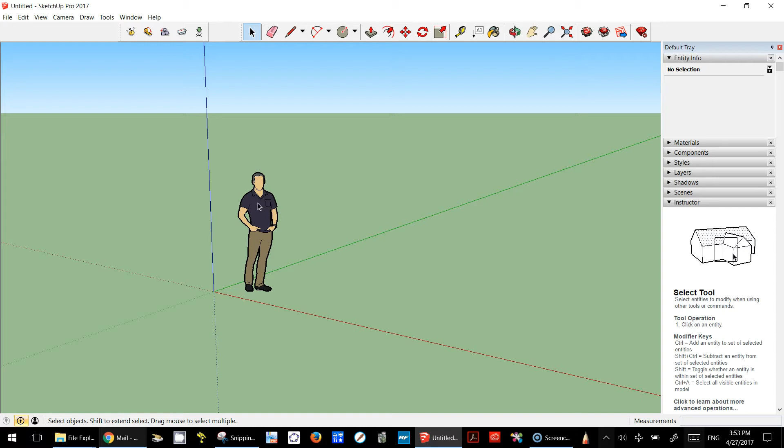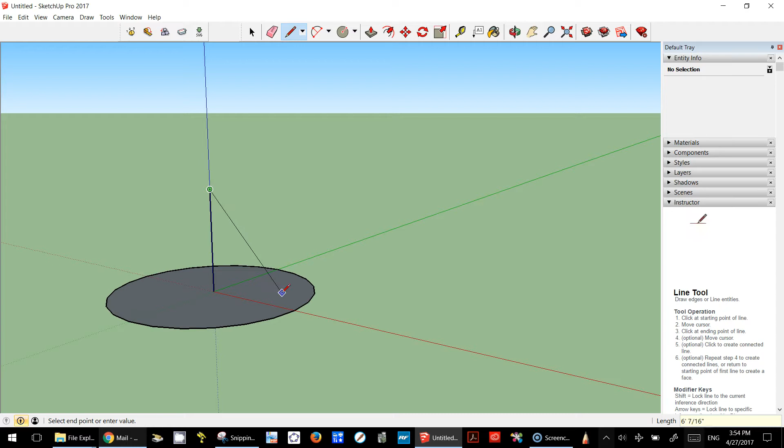First I'm going to get rid of this guy, right click and erase. Then I have to create a cone. Using the circle tool, I'll put 5 feet for the radius. Then I'm going to draw a triangle, going up maybe 5 feet, using a line tool to draw a triangle here.

Then we can use the follow me tool here. So we choose the circular path, say follow me, and click on that. So we got a cone.

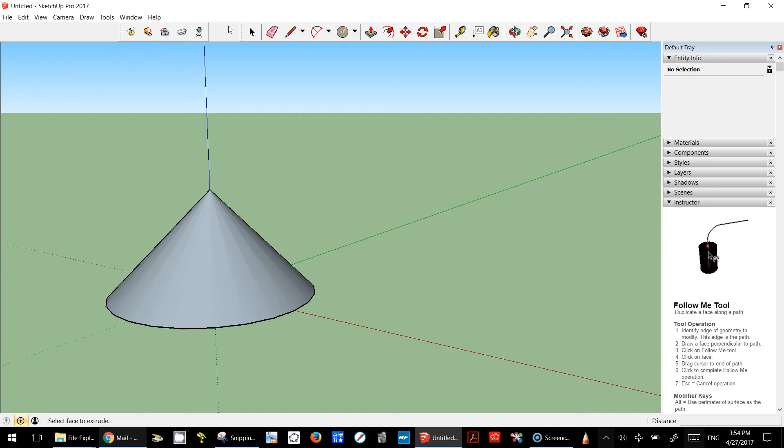The first thing is I'm going to make a group so that we don't destroy this. Choose the whole cone, right click, and say make group. So it's like one chunk.

Then I'm going to move this to move the vertex to the origin. I'm going to move it down here, and it kind of locks in, so it's kind of nice.

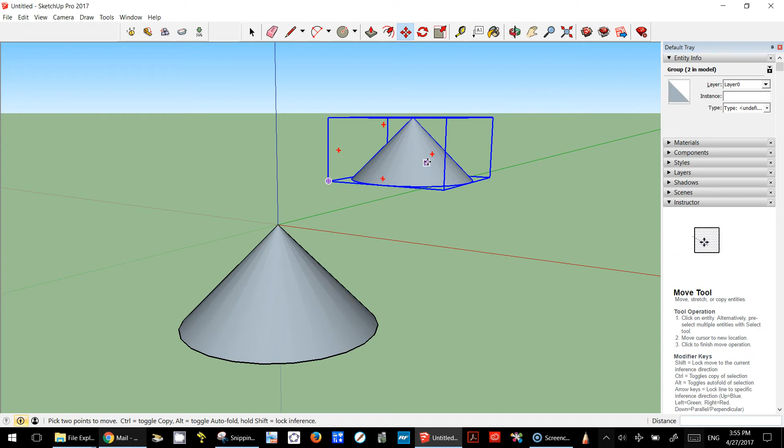Then I'm going to create another one. I'm going to say copy and then paste, so we have another one. And I'm going to put this guy upside down by right clicking on it, then say flip along the blue axis. So if you do that, then it's upside down now.

Then I'm going to put this vertex right at the origin too. Oops, I didn't want to do that. Let's see, I'm gonna say undo move.

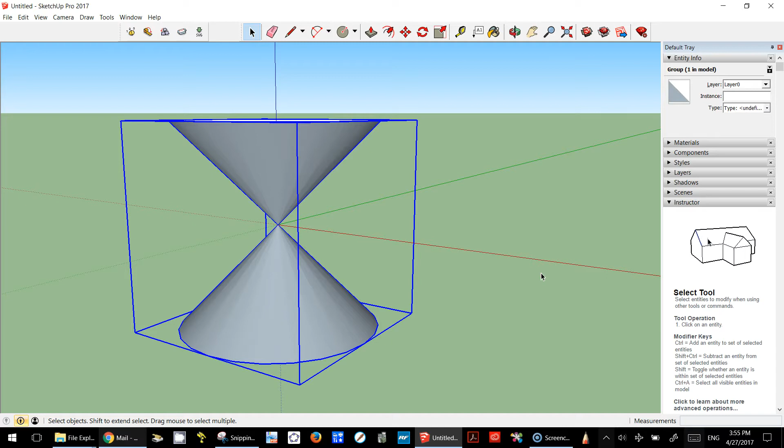Next step is I'm gonna actually choose the whole thing, both of them, right click and explode it first, and then right click and make a group. So now it's two of them as a chunk.

Then what we want to do is construct conic sections: parabola, hyperbola, ellipse, and also circle too. So what we want to do is let's do a circle first, the easiest one.

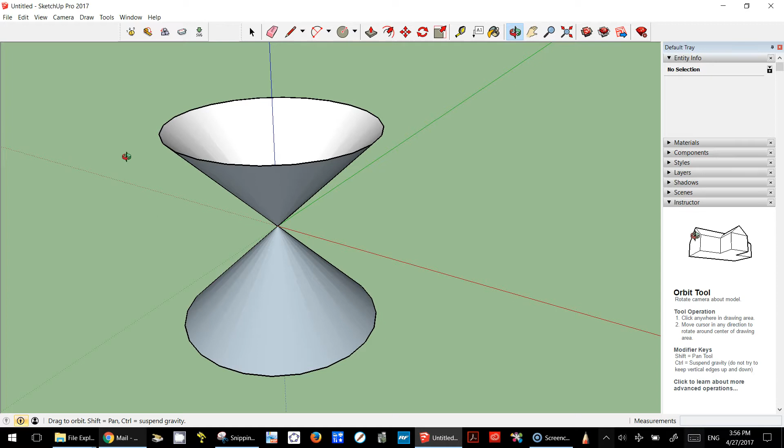Go to tools, and then there's a section plane. The blue one is a nice one. So I'm gonna just change to blue and put it there.

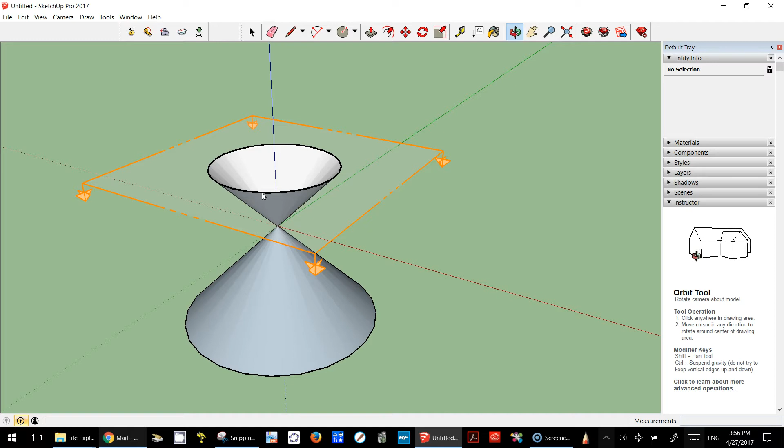What it does is it takes the cone and cuts it by a plane, and then we can go up and down. Choose this guy, then you can just drag it up and down, holding the click, and then move this guy up and down. So you can see that you're going to have a circle with various radius by doing that.

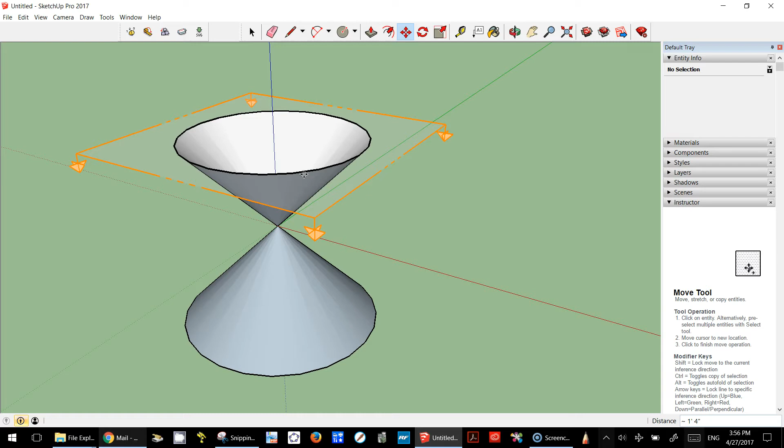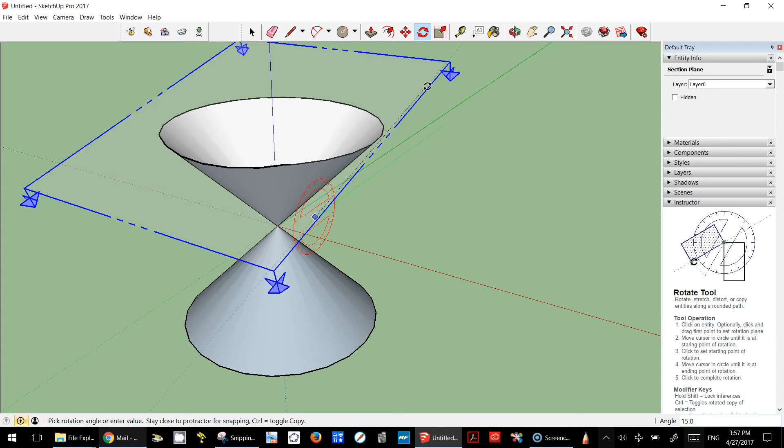The next thing is you can actually tilt it a little bit. To tilt it, I'm going to use the rotate tool. Then I would like to rotate it along the red one, using the arrow key to choose the red one. Click here, then click another point, then you can just rotate it. I'll just tilt it a little bit, and keep it here.

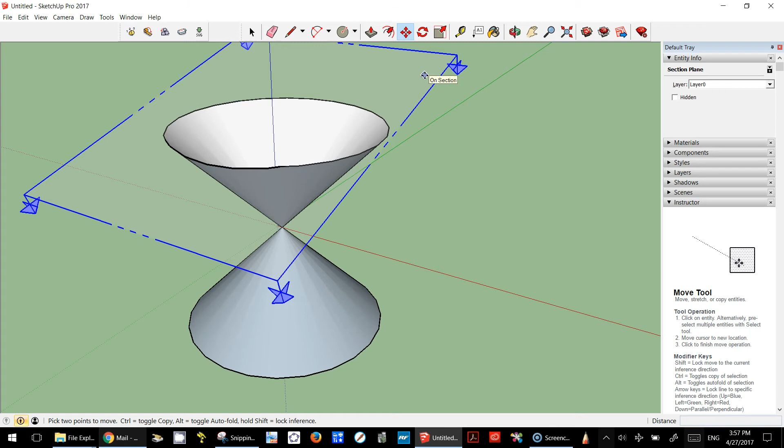Then go back to the move tool. So I'm going to use the move tool to move this section plane. If you can see, if you move this, the cross section is going to be an ellipse.

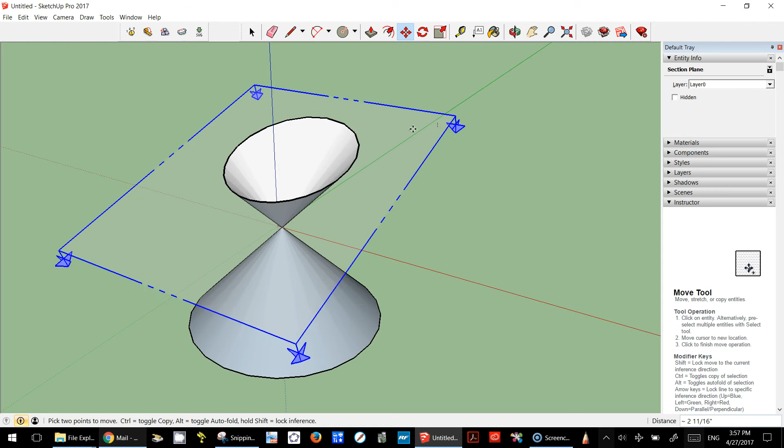Because if you tilt it a little bit, you're going to end up getting an ellipse. Another thing we can do is we can get the hyperbola. So I'm going to get rid of this plane and get a new one.

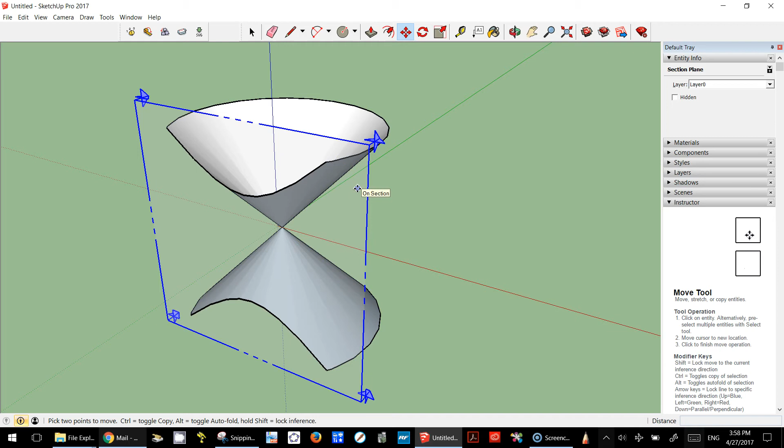Tool and the section plane, then use the arrow keys to pick the vertical one. Here's a vertical one. So I'm going to place it and lock it there. Then use the move tool to move this section plane. You can see that the cross section is a hyperbola.

So we could get circle, ellipse, and this one is a hyperbola, and another one is the parabola. So let's try to get a parabola.

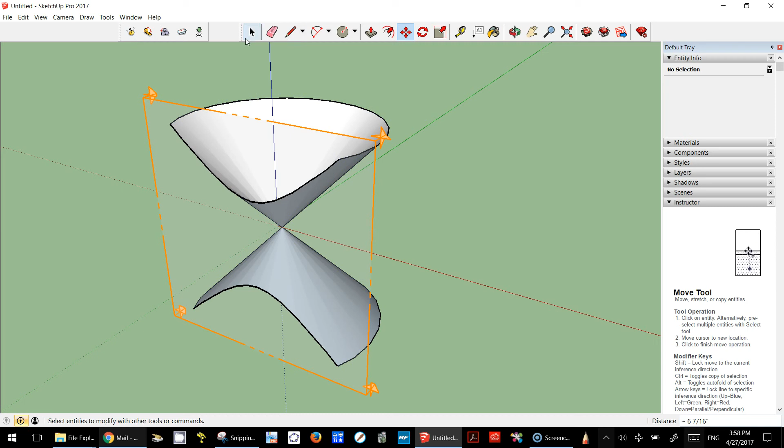I'm gonna just get rid of this guy, erase, and get a new one. Let's see if I can get the tools and section plane, and use the arrow key maybe to get it. If not, I'll change it. I don't think we can get one like that. Oh, actually, this might work.

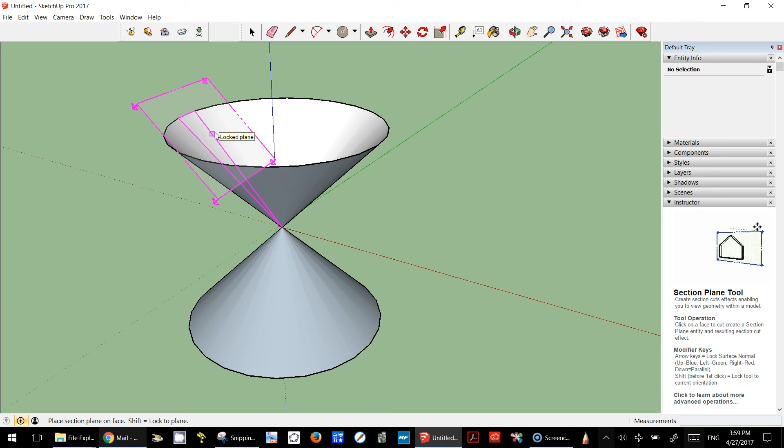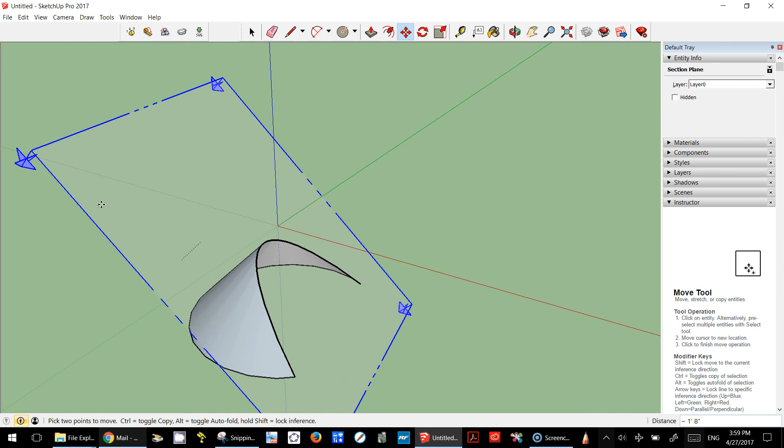So I'm gonna choose that one. Then you can see that if you move this guy, you can see that this is going to be a parabola. If you go here, you have a parabola facing down, and here you have a parabola facing up. If you tilt it like that, you can also create a parabola as well.

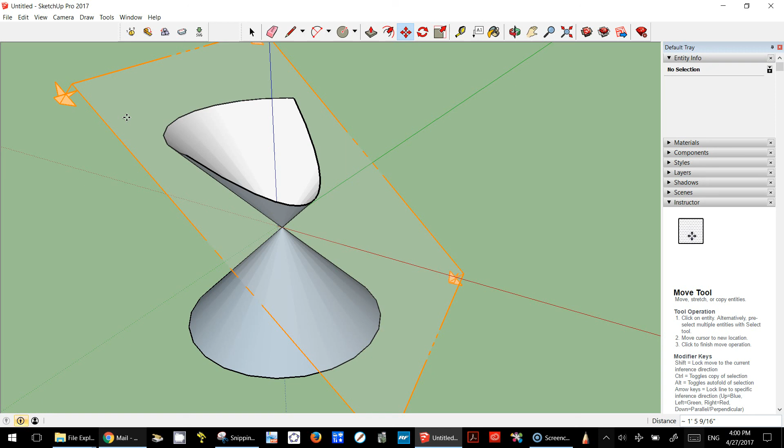So all these conic sections can be constructed by first constructing the cones, one's two kind of put together. Then use section tools, section plane, to slice it so that you can see the cross section, which will end up becoming conic sections. All right, that's it. I hope that this was clear.